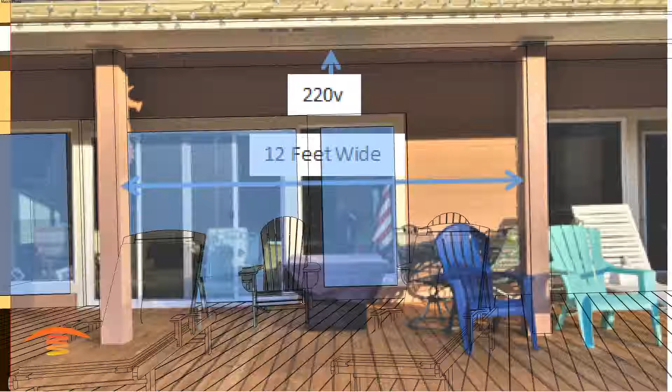Here we have a residential application. So as you can see here, we have this 12-foot wide span. I think they're interested in just heating up this area. They do have like a fire pit or something here in the middle. I'm not quite sure what that is and whether it's going to stay or not. It's a deck material here.

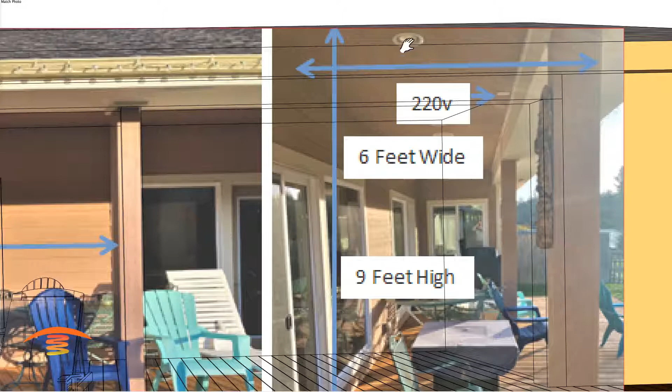A beam that's up here that we need to be aware of. And then also if I pull this over, you can see the side. We got 6 foot wide, 9 feet high, and there's an outlet up here, he says, at 220, with a couple of can lights, one back here, one over here. So I'm not quite sure about the dimensions of the can lights, but let's go ahead and see what we can do with this application.

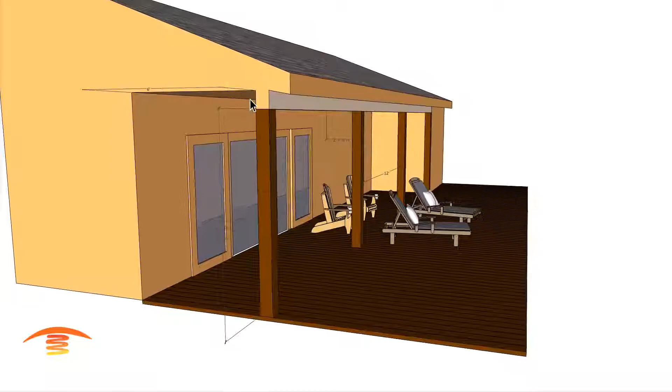Again, this confirms that we have our dimensions proper. We got 12. I got 8 feet 3 inches here to the bottom edge, and then 9 to the top here. 6 feet deep, and that's about it. I'll have this up here in a second. So let me turn that off.

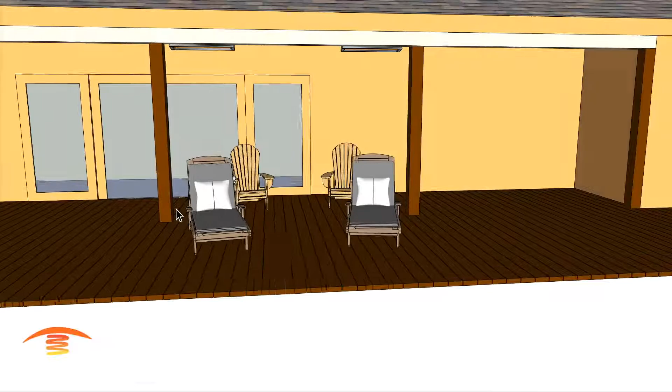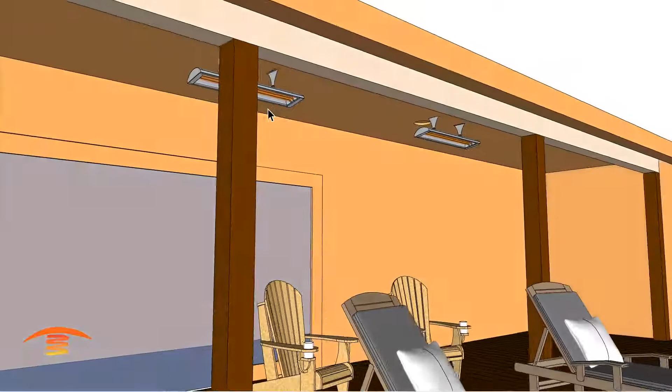There's two options that we could do. Option one would be, because the span is 12 feet wide, I would like to have something that could meet over the edge to that span. So I've chose two of the CD 5024s, 5,000 watt, 240 volt dual element units. Now the issue I have is the actual placement of these can lights up here.

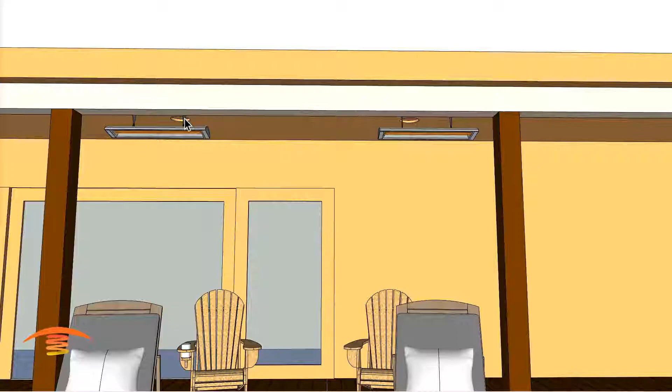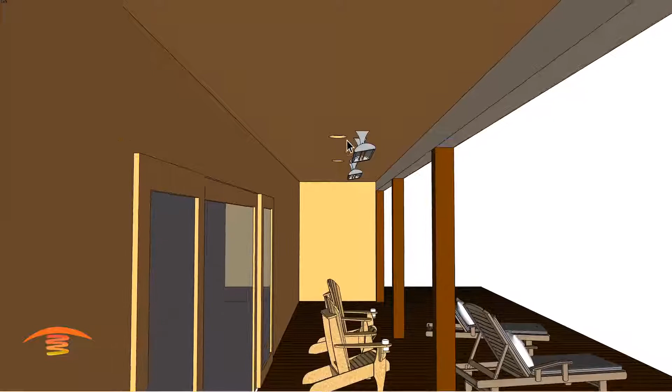I have them at 4 feet from center of this 12-foot space. So they're 8 foot center to center, and then 4 foot from this center point to the center point of the light itself. With that being said, if I put the heaters right there in the center of the room, then of course it'll be blocking the light. I can't do that. So what I've done is offset them as much as possible, and that's what I have that other measurement for. So I'm going to turn that back on.

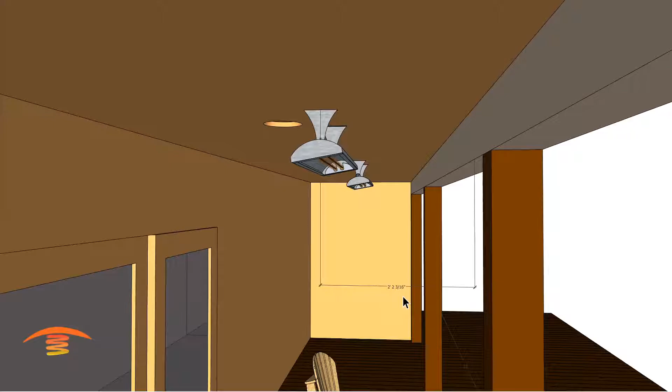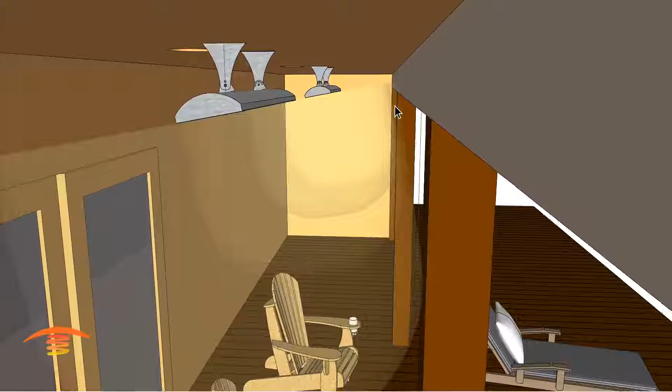The center of this bracket I have at 2 feet 2 3/16 from this edge here to this point, and that's assuming that these lights are in the center of the room. Now the reason behind that is because of the clearance below, as you can see, with a 10-degree tilt, so I want to get that ray out as far as possible. With that 10-degree tilt, I'm still meeting the clearance to this beam here, and of course up here is another issue that we want to make sure we're meeting that clearance.

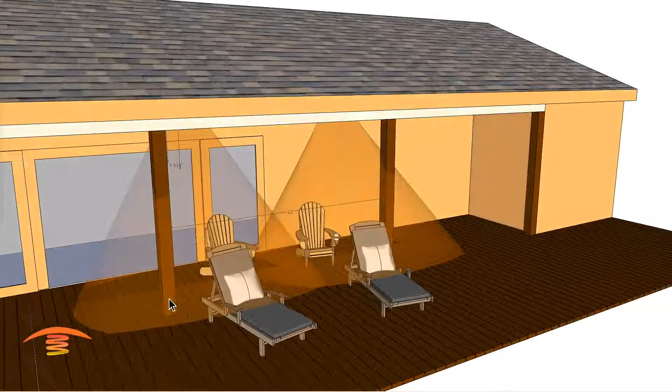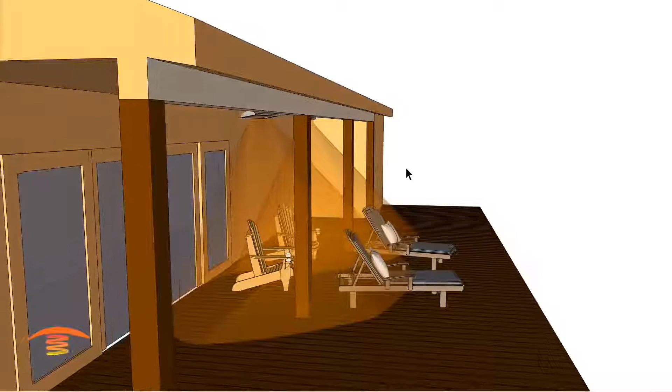So I think we're fine with that, and you can see now with the 2 units how we have a nice footprint of heat. I'm going to turn off the below clearance here. This way we're covering as much as possible. If you're going to go through the extent of placing some units in here, then you want to make sure you do something that's going to be of value to you. So that's why I'm recommending that you place 2 units in here. Now that doesn't mean that's the way it has to be, this is just a recommendation. But you can see we have a nice footprint of heat throughout this whole space.

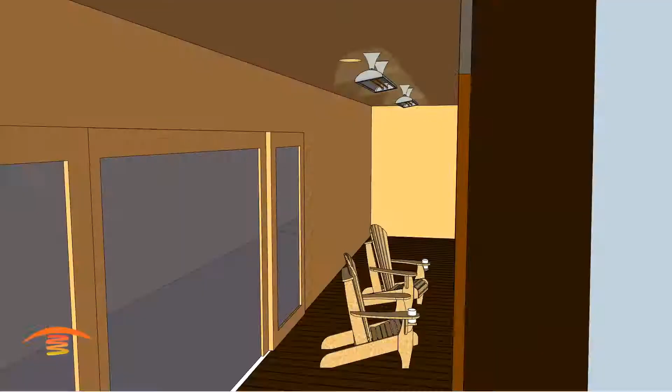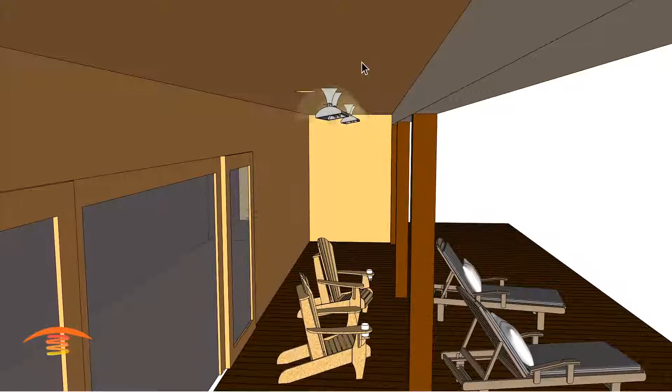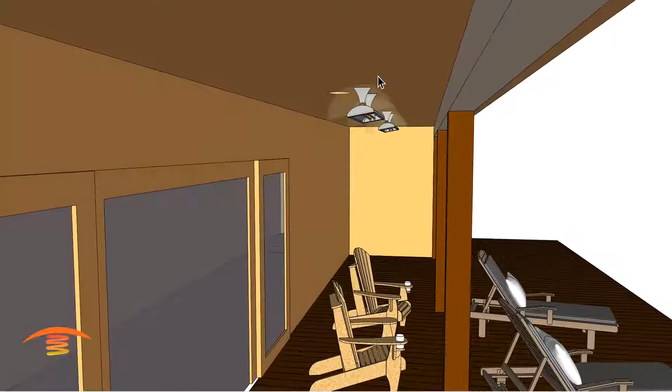And then I just want to go back into the clearances above. I'm going to turn off the ray here, and you can see that with a 6-inch clearance and the 10-degree tilt, we're meeting all the clearance around the heater itself. So now you could recess these heaters if you have the structure above to allow that to be done easily without manipulating the structural integrity of the property. But I'm just assuming at this point that they're probably going to do a surface mount. So I'm going to leave it at that.

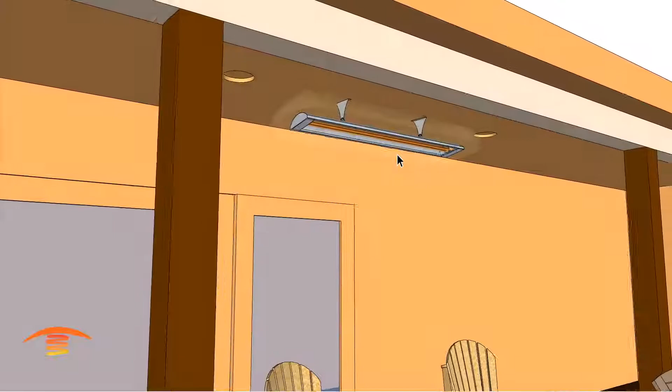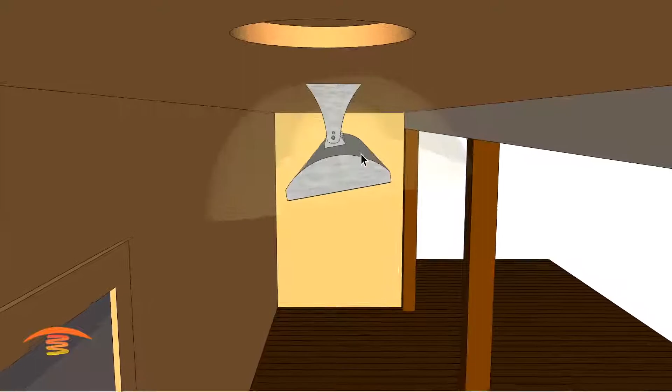Now option 2 would be to place 1. I have it as a 6,000 watt unit, but it could be a 4,000 watt unit. I wouldn't go anything less than a 4,000 watt unit due to the height. But again, I have a 10-degree tilt, and this time I've centered it in the room. So you can see here the 6-foot span, I have it at 3 feet center, and tilted at 10 degrees again. And also we're meeting the clearances with that 10-degree tilt, and there's nothing for the front clearance to be an issue with. So I'll just show that real quick, but you can see there's no clearance issue.

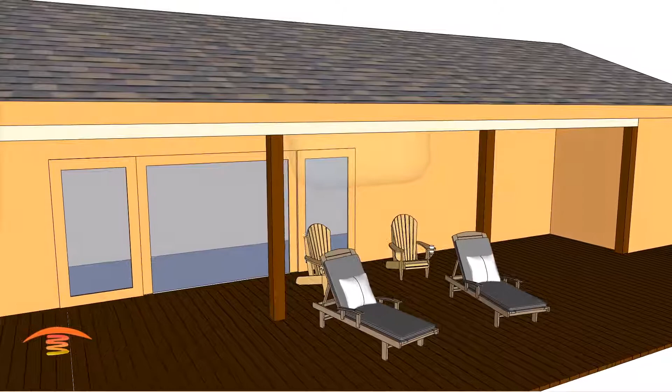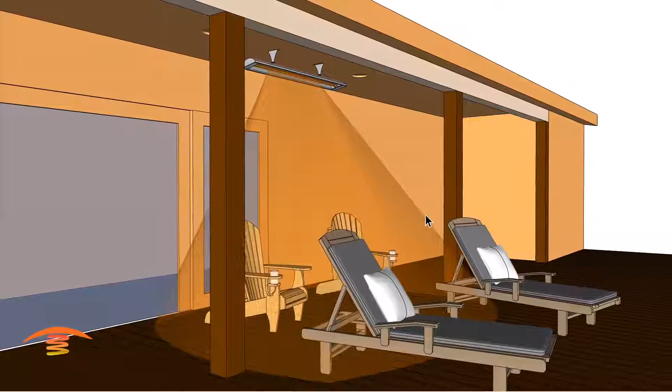And also this is a sliding door, so it goes left to right, not out into the patio, so not an issue there. And these are just windows, so we'll leave it at that. Footprint of heat, let's see. So you can see the footprint of heat with the 6,000 watt unit. We're actually at an excess amount of heat. The throw goes a little bit further than the height of 9 feet. But it does give you a higher option of temperatures. So if that's possible, then great.

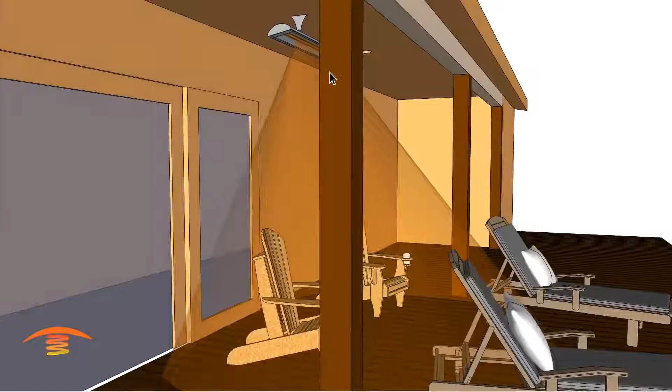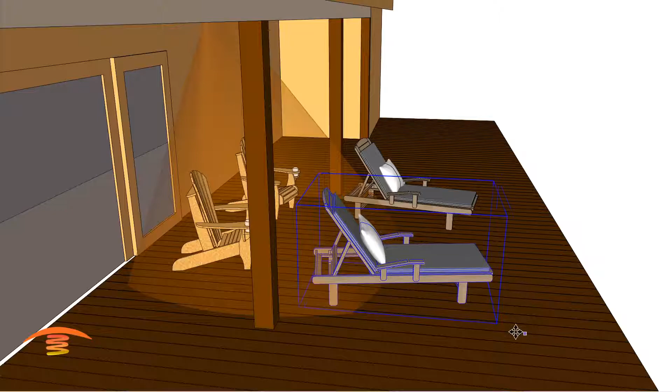If not, I understand, you could go with a 4,000 watt unit, single element, and your footprint of heat will be pretty much identical to this. It just won't be as intense. So I think if you were sitting up here in these two chairs, you'd be comfortable. These here, no matter what you do, you're not going to be comfortable unless you were to move the unit or the chair into the ray, and even that is going to be hard to get in the position that you really want it to.

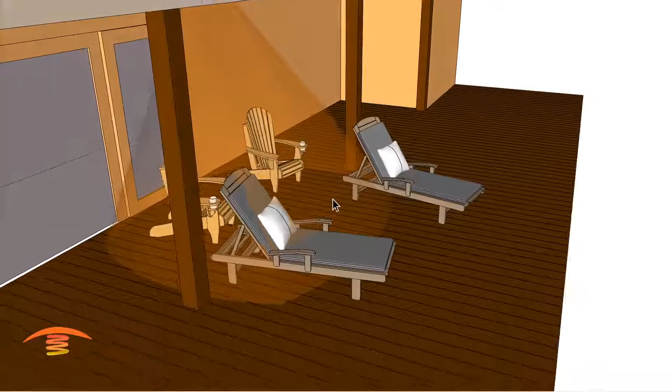Now you could put additional chairs in here, or smaller chairs, 4 of them in this circle here. But yeah, that's going to be the extent of the coverage. And that's true with the other units too. You can't cover out this far unless you put an additional unit out here on this ledge, and then you have clearance issues that you have to deal with as well. So, all right, I hope this helps.